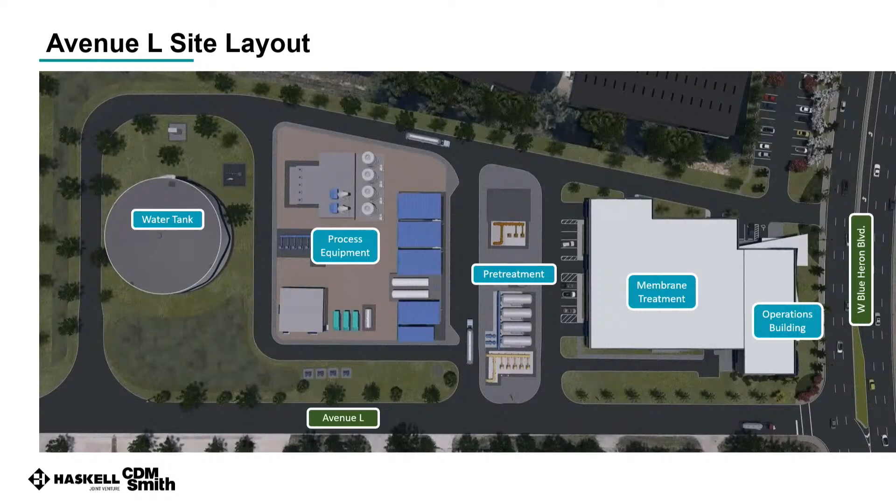On Avenue L, that is an 8-acre tract on the corner of Blue Heron Boulevard and Avenue L, and you can see prominently facing Blue Heron Boulevard, you'd see the operations building. Behind it is the membrane treatment. Behind it would be the pre-treatment facilities, and then in the section behind it would be where you would store your chemical storage, as well as have your transfer and your distribution pump stations. And then in the very back of the 8-acre tract is a 5 million gallon ground storage tank.

Separate apart from Avenue L, we are performing improvements on the Avenue U site. The Avenue U site is an existing Riviera Beach facility that is at the corner of Martin Luther King Boulevard and Avenue U. And it currently has an existing ground storage tank and an existing pump station. The improvements that we're making is we're going to be adding a proposed maintenance shop that would be used by the USD, and we'll be constructing 2 groundwater supply wells.

At the last presentation we provided to you, we were describing the different aquifers that we're going to be adding the groundwater supply wells to. You've got the shallower wells, which are surficial. We're going to be adding 2 surficial wells. This will be the 1 well that we'll be adding, and then we'll be adding a total of 6 Floridan wells. This will be well 5. The Floridan wells are much deeper.

Aside from the 2 additional wells, we're going to be reconditioning the site, providing for utility storage, pipe materials, generator storage, all in providing an overall modification to the site, which would require a site development permit. Part of the land development code would be to construct a new proposed dry detention pond that you can see in the upper right-hand corner.

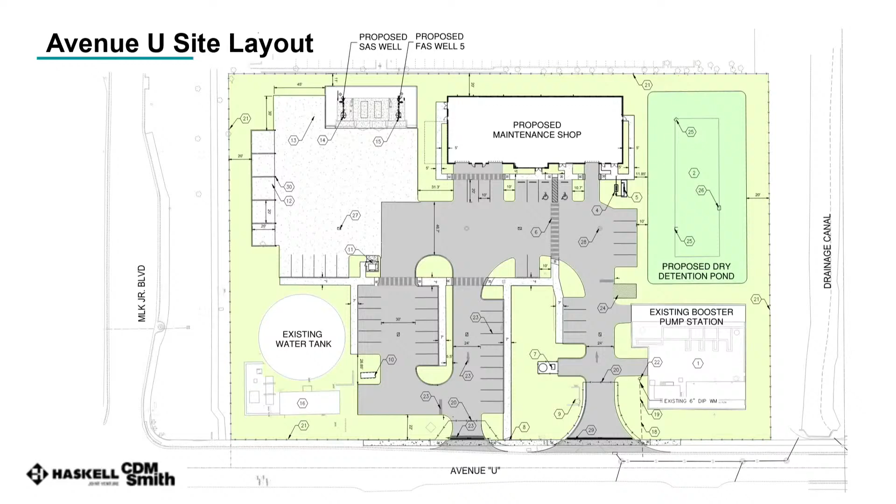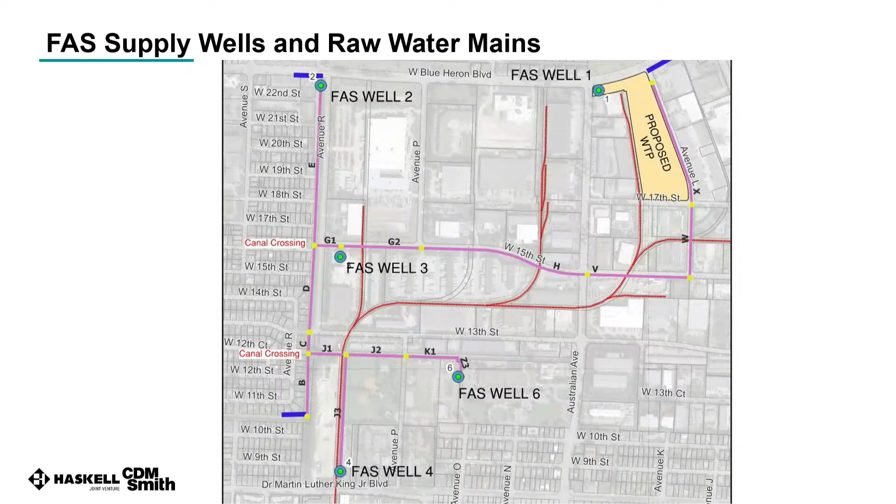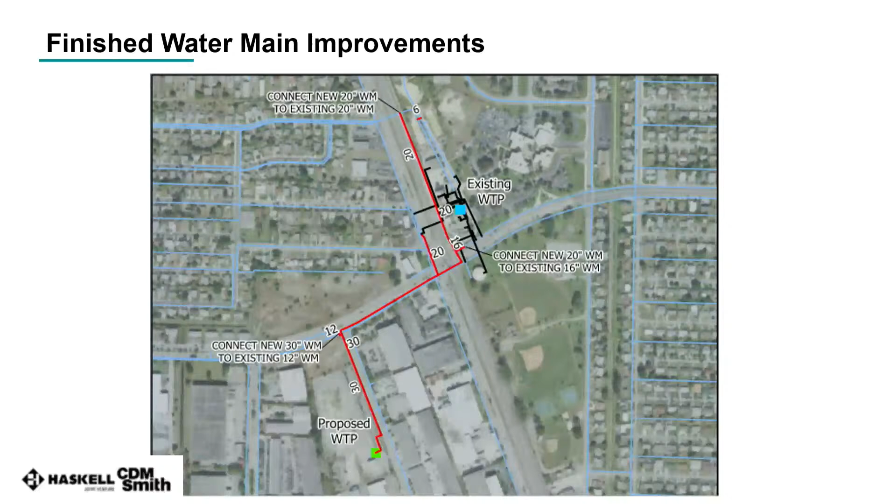So once we make you the best tasting water at Avenue L, you can see at the lower portion of the slide the proposed water treatment plant. We would need to get the finished, treated water to the existing Riviera Beach distribution system. So we've got about another mile and a half of proposed finished water main pipeline improvements to tie the new treatment plant into the existing distribution system. So I felt that was necessary to kind of get your arms around what the depth and breadth of our scope is.

We discussed last time that we were conducting pilot activities, pilot work. We had been piloting 2 different nanofiltration membrane units. Since that time, we've completed that testing, and we've now decommissioned those 2 pilot units. We're continuing with some additional work on the pre-treatment system to refine the design criteria to get you the best pre-treatment system to be able to handle any water that comes our way to the plant to be able to treat it.

In February, we discussed the early work package at the commission meeting. We did receive the purchase order in March. The scope of the early work was a lot of demolition work at Avenue L, removal of a fuel station that's currently at the Avenue L site. We're also going to be performing some additional environmental work at Avenue L. All that is included in that work package. The land lease agreement for Avenue L was discussed today, so that is completed.

On a permitting front, we have obtained all the site permits, state permits that are needed for the demolition of the fuel station. So we're ready to get going with that work there. Other permits that have been submitted would be all the city permits that are needed for site demolition, as well as the early work package site development permit submittal. We've also submitted the zoning and land use change for Avenue L that was discussed in the February meeting. In May, we are proposing to complete and submit the site development permit submittal for the entirety of the Avenue L work. And then in June, we were proposing to submit the site development permit related to the Avenue U work.

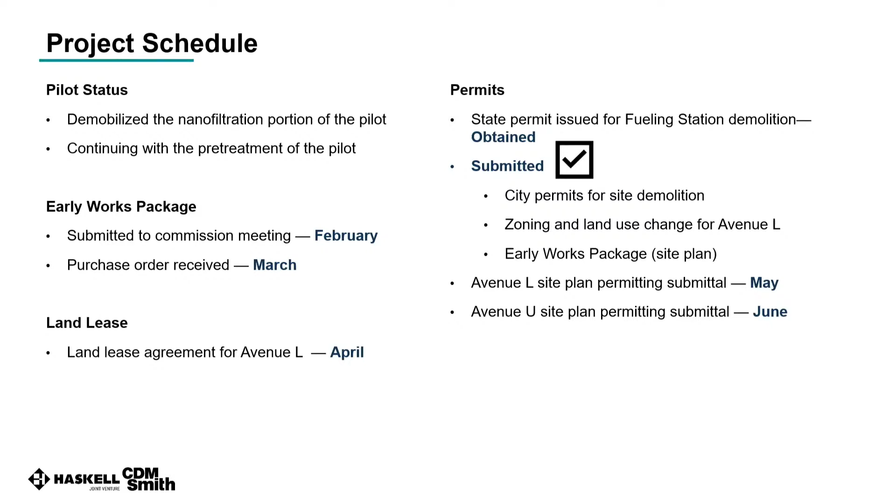So my final slide here is just an update on the design and construction. From a design perspective, we've submitted the 60% complete of all the supply groundwater wells. We've also achieved the 30% design milestone for all the work on Avenue L. We've also completed a technical memorandum to define what our recommended plan would be for the finished water piping system. In the design sequence, we have Avenue U, where we are proposing to have a 30% complete submittal ready for June. And we're going to be completing an extensive value engineering effort.

That value engineering effort, where we're going to be working with the USD and the advisor, Brown and Caldwell, would be to identify cost savings that can be employed on the project where we can spend less money to meet the same design intent. So in essence, that value engineering effort is going to be a deep dive review on what we've currently got proposed. It's always good to complete those types of value engineering exercises early in the design phase so you can implement those without too much hassle as you move forward. The outputs from that exercise will lead to the 60% design submittal for Avenue L, which would pave the way for the GMP.

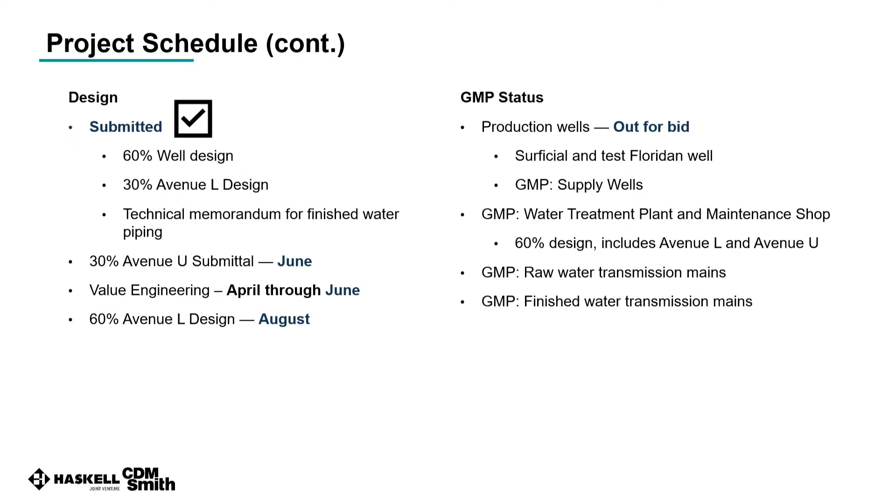We've got 3 GMPs after that that are proposed. The GMP for the entirety of the water treatment plant and the maintenance shop at Avenue U. Then a GMP related to, as I showed in my earlier slide, all the raw water transmission main work, and then a GMP related to the finished water transmission mains.

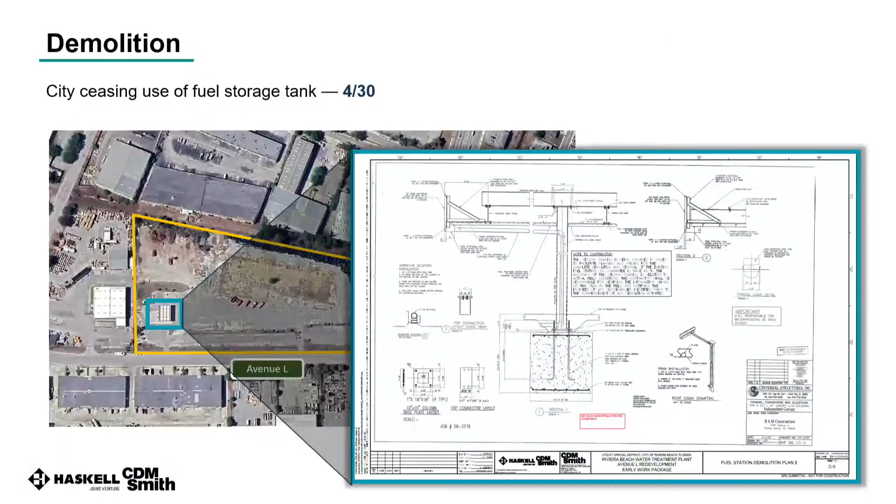So now I want to hand it over to Beth to kind of go over the top 3 renderings that we've got feedback on, and so she can go over a high level and kind of explain the schedule and cost baseline associated with each of those different rendering options. Beth?

Hello, everyone. I'm Beth Lentz, an architect for the project. Closer, thank you. There we go. Yep.

So at the last district meeting, we provided several design concepts for you all to review. And from those several concepts, they were narrowed down to 3 favorite preferences. Our JV team did a very high-level cost estimate comparison between the 3 different designs. So this first option 1 is our baseline design. It's your most value for the project. It's very cost-effective.

The building is mostly concrete panels with textures, inset reveals, different color patterns. This design has mostly punched window openings with a little bit of tall feature curtain wall at the main lobby entrance, and also a little bit of metal panel accents and sunshades.

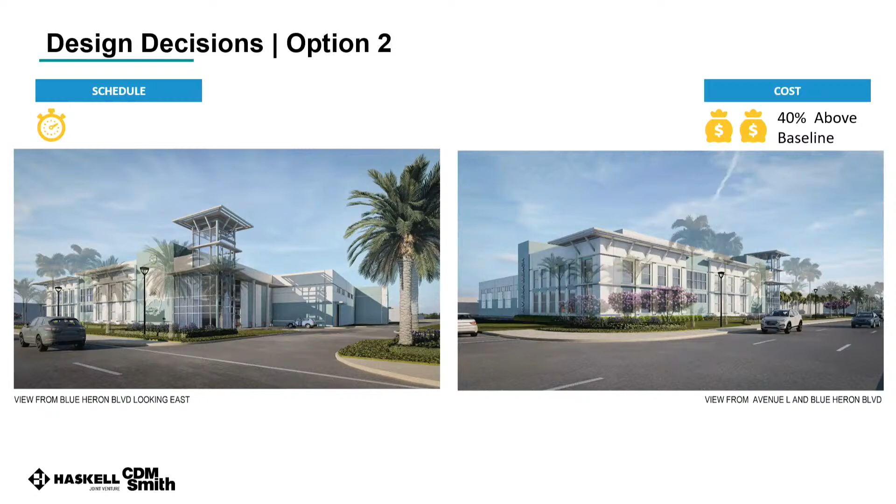This option also has a custom curved metal canopy, additional metal panels that add to the cost for this option. You'll notice that between option 1 and 2, the shape of the building is very similar. So the basic structure of the building is about the same. But then for option 3, it's a very differently shaped building.

Option 3 is the most expensive design concept. It's a different shape toward Blue Heron. It has a large planar curved wall at the front that is clad in a stone veneer, which gives a little bit more texture and refinement at the street. This option also has a little bit more square footage because of the expanded curve feature toward the street. And the second floor has a cantilevered segmented curtain wall feature along the front facade as well.

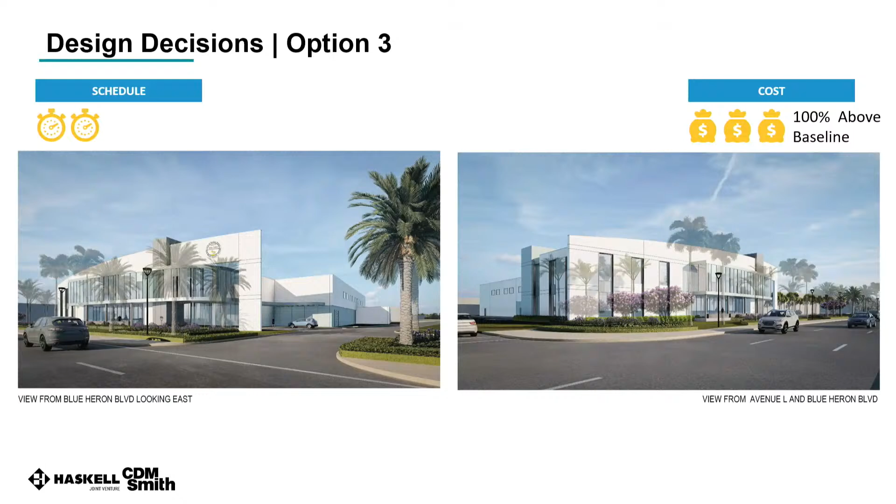So tonight, we would really like some guidance from you all on which structural massing you prefer for the building. And then we can work with you closely over the next few months to further define and refine a lot of the architectural features on the building itself. So there's several things that don't need a decision today, but the overall structure of the building and the shape of it is really important for us to progress the design forward.

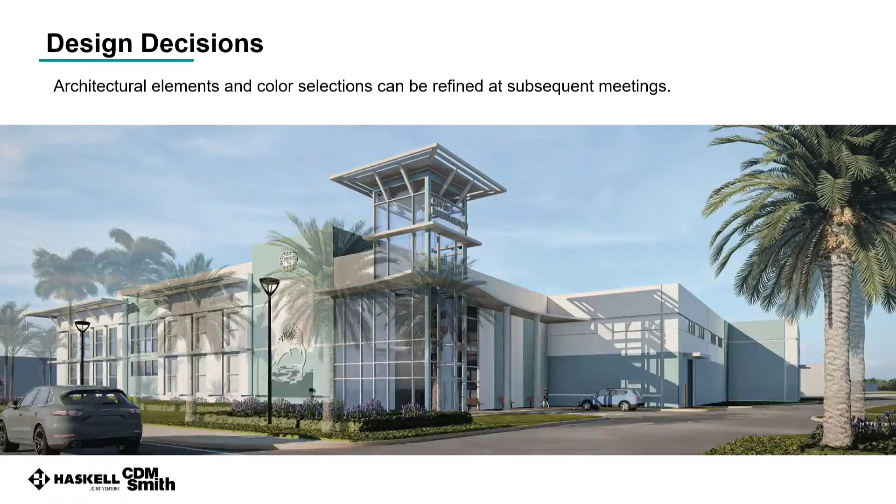Some of the things that we can further define with you are the overall color scheme of the building and the patterns and textures that we have around the whole building. The canopy shape and material can change. The specific signage on the building, how much glass, what color is the glass and the frame, other architectural elements like the sunshades, what is the shape, what is the placement, how does that look?

And then right now on the design concepts, we have a large panel that has an image relief and logo that may match the logo of the city or the utility special district. That's up in the air. We can work with you on exactly what is on the building at that time, but that's something that we can further define later.

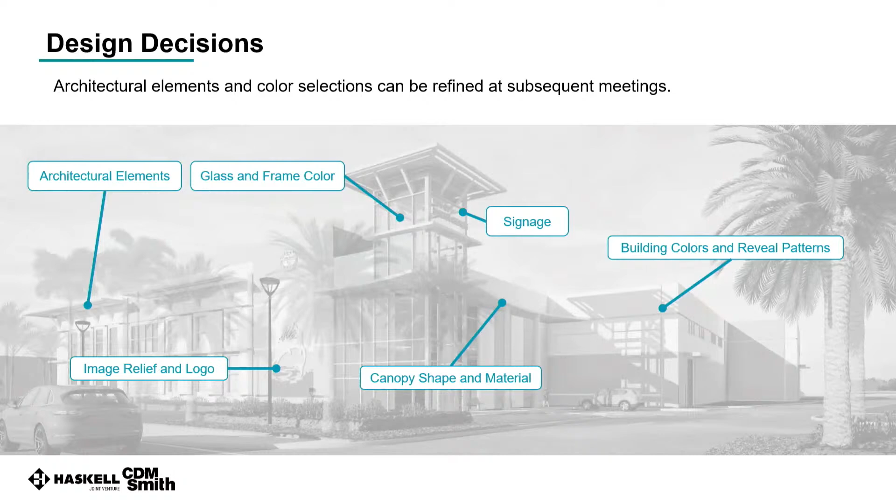So next steps. The next steps that we're asking for the board to make decisions. Like Beth asked, we are progressing the design. The basis of our design for the 30% is option 2. But we would ask that we could receive some input on which direction the JV should proceed with: option 1, option 2, or option 3. So tonight I'm asking for a board vote on that, so we could have direction on which way for our designers to move forward with.

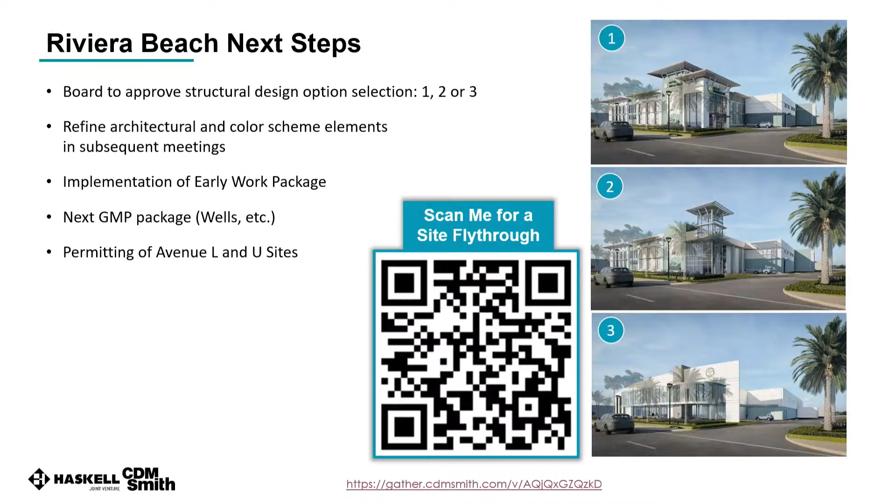Thank you. Pro Tem Lanier, go ahead. I have some questions. Well, actually, I have one question. I think that I need to have a meeting one-on-one with you guys because this was an issue that we took up 5 years ago, and it was $100 million. And then after the pandemic, it was $200 million. And now we're up to $300 million. And I need to find out, what are we paying for?

We're talking about designs and we're talking about structure, and that's all well and good, but we need to agree on a price, because what's happening is that from day to day, week to week, it changes. And we're up to $300 million, and that is ludicrous. People build water plants for $80 million. So we really have to have some conversations about where we are in this process. Number one, it's taken 5 years, and number 2, we're up to that kind of money.

And I don't want to go into it here, but until I have a conversation with you guys one-on-one, because I really need to understand what this budget is and where this money is going, because this is a lot of money, and we've gotten double and a half the amount of money that we started with. So this is really taking me by surprise, especially that last meeting when I heard about the $300 million. So we really need to slow this down so I can figure out and be able to articulate where this money is and how it's going to be spent and why we're spending so much.